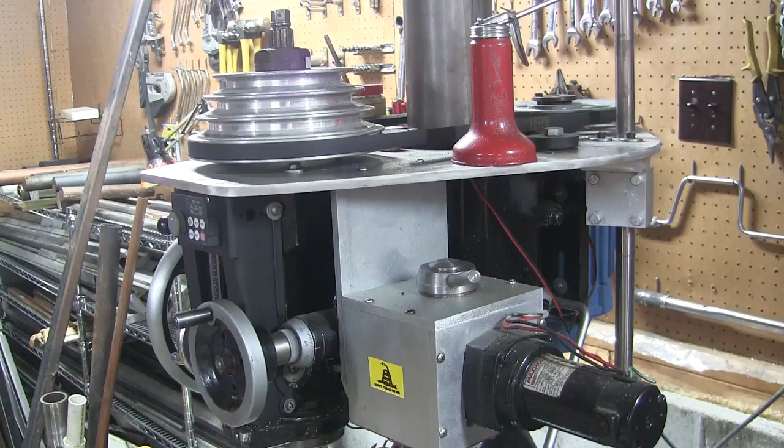Well guys, the time has come to do another modification to the mighty Rong Fu. And what I'm going to do is take the 2-axis DRO I have off of this thing along with this Z-axis, and I'm going to install a real 3-axis DRO.

People are probably wondering, why are you not going to use this anymore? Well, what I've decided to do here is to incorporate a Z-axis that will read the quill as well as the position of where it is on this RAM, on this column. And the way I'm going to do that is I'm going to get a scale that goes from this, well, let me get on the other side here. Goes from this bracket through the housing, through this plate, and up to this bracket.

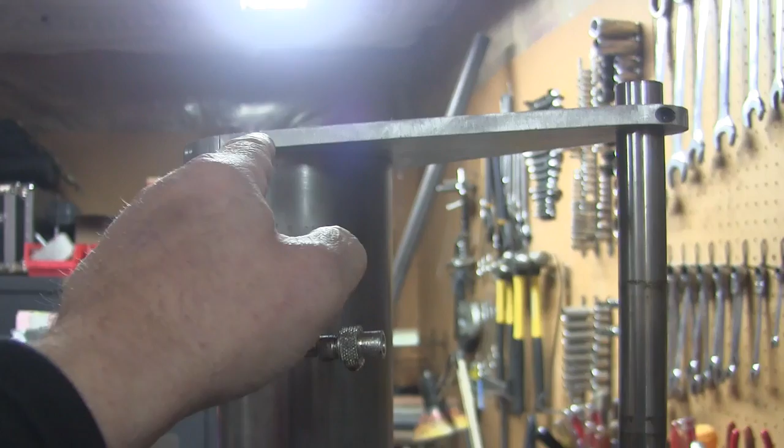Okay? And then I'm going to attach the reader to the quill. And what that will do is, when I raise the head, the quill will go with it, and that will read Z. And when I lower the quill inside, it will pull the reader down.

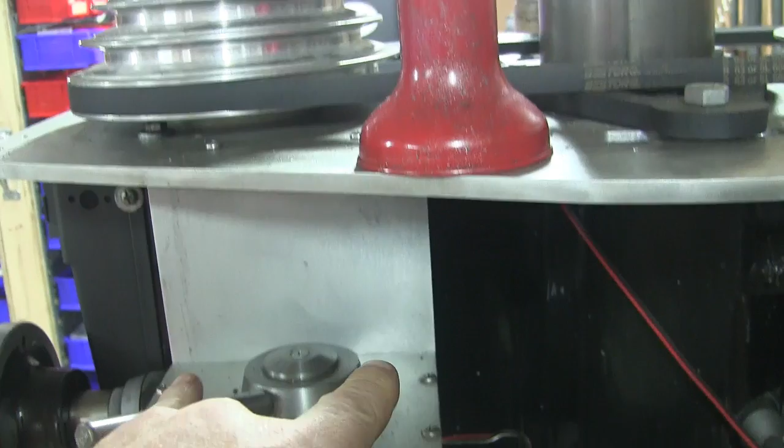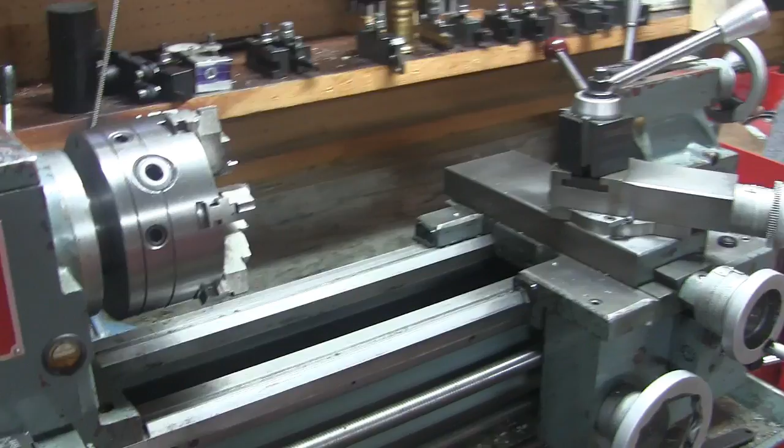Now, the reason I'm doing this is because I want to put this DRO, which is a 2-axis DRO, on this lathe. And you may recall that before I moved, I installed this encoder on the X-axis, which works great, but I'm kind of getting tired of swapping connectors back and forth between the mill and the lathe. So what I'm going to do is eventually I'm going to take this encoder right here and cut it down and mount it right here.

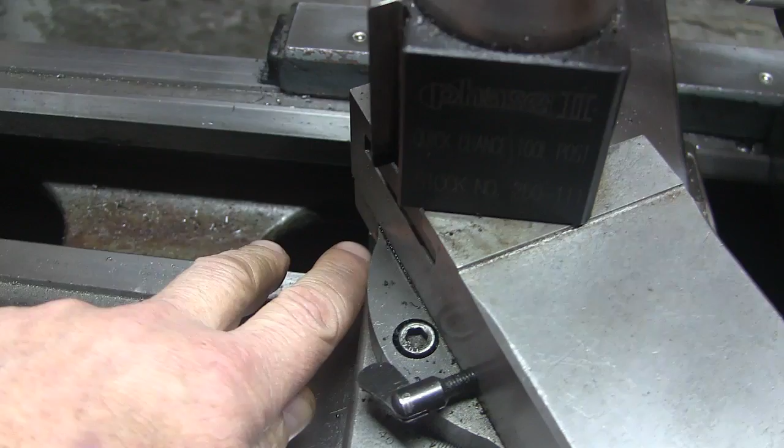I was going to mount it over here like I see a lot of people do, but with this lathe here, this edge will never get to this point here. It just doesn't get that close. The spindle sticks out farther than that. So if I put it on this side of the compound or the cross slide, I will lose the space in between the tailstock and the cross slide. But if I put it over here, I won't lose any space. So that's the plan for this, and that will happen subsequent to me taking apart the mighty Rong Fu.

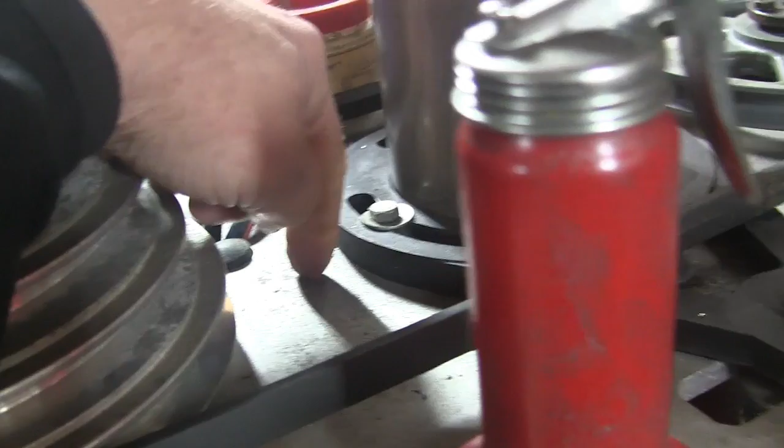So anyways, the one thing that I have to do here, well, there's a couple things actually. First thing I have to do is I have to drill a hole down through here to allow the encoder to come up through. And then I have to build a couple little attachment blocks right here.

Now, one of the things that caused me to want to do this is the fact that there are companies on Amazon in China that will sell you 3-axis DROs for a little over $300, which is like silly cheap. And they got 5-micron scales on them, which is plenty accurate enough for what you're going to be doing with the mini mill like this.

So the deal was with the one that I bought is they will cut the scales to whatever size you want. So what I did is I measured my X and Y and Z requirements, and I sent that to them, and they are sending me scales that are already cut to the lengths that I need. I hope they're going to be right. I might end up cutting them myself if not.

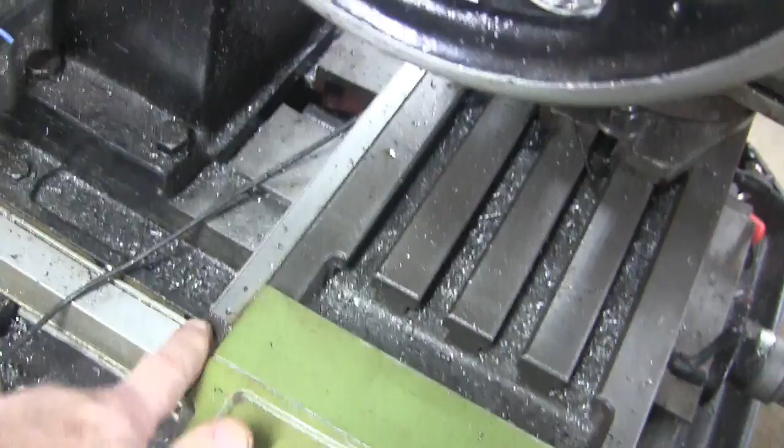I have cut these scales before. You've got to kind of be careful. What I do is I will cut the aluminum extrusions, like for this one. This one used to be about 4 feet long. I cut the aluminum extrusions, and then use a Dremel tool with a carbide cutter wheel to cut the glass. And you can do that. I mean, you got to be careful, and typically I cut my encoders as long as I can get them, so that if I do kind of chew up the end of it a little, it's not going to be a big deal.

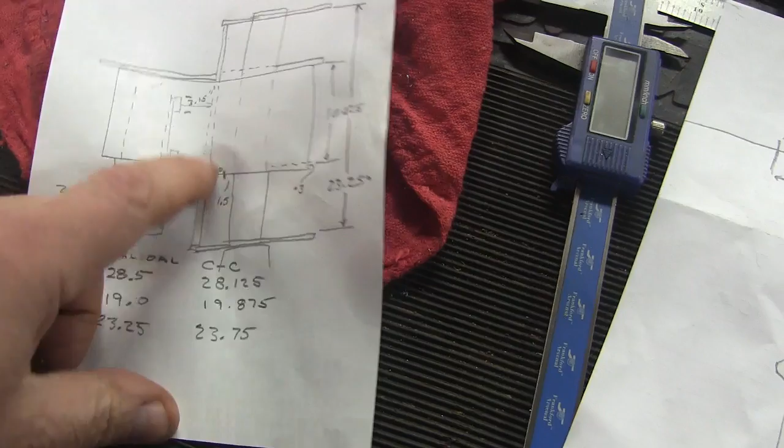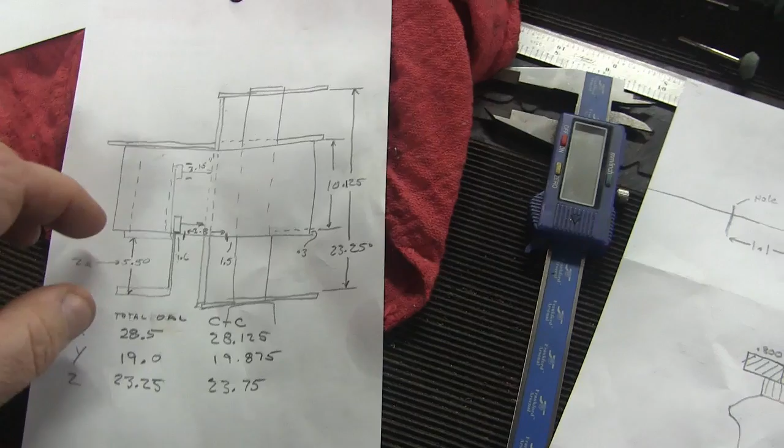So what I will do is I will attach a very rigid bar to the quill so that the encoder reader is encased within the head of the thing. And since the quill only has to move up and down, it's like 5.5 inches on my machine, that reader and encoder will always be inside of the head, so I don't have to worry about chips and stuff getting in there.

You know, obviously when I raise the head all the way to the top, there'll be a little bit exposed on the bottom and vice versa, but the encoder that I bought has lip seals on it, so as long as we're not really stupid with the air gun, it shouldn't ever be a problem. And I'll route the cable up and out the back for the Z-axis.

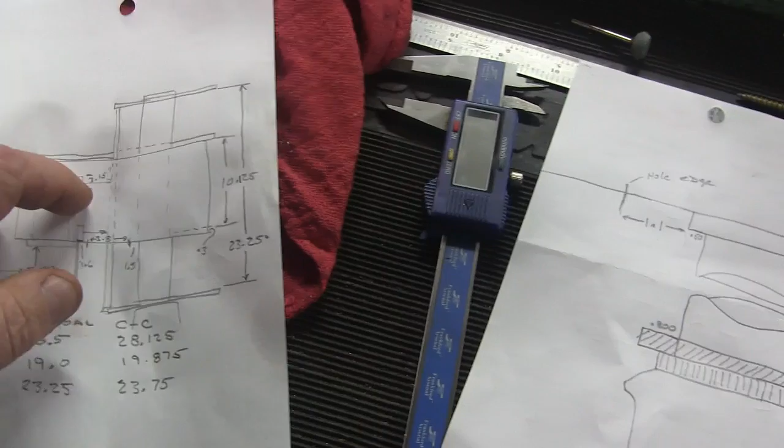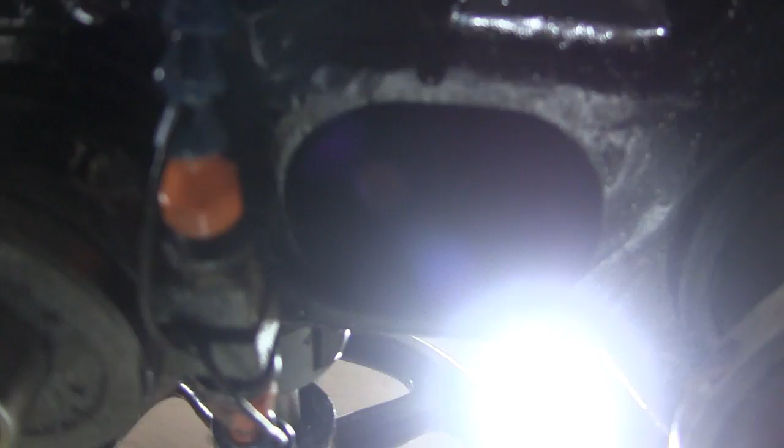So I'm going to get started here. I'm not going to show too much of this as far as me drilling holes in the machine and stuff like that, because everybody's machine is a little different. You know, I realize nobody has big plates on the top like I do, but all the RF30s have these holes right here, and typically it's for the light bulb. So that's where the encoder is going to come out the bottom of my casting. Alright, so let's get started here.

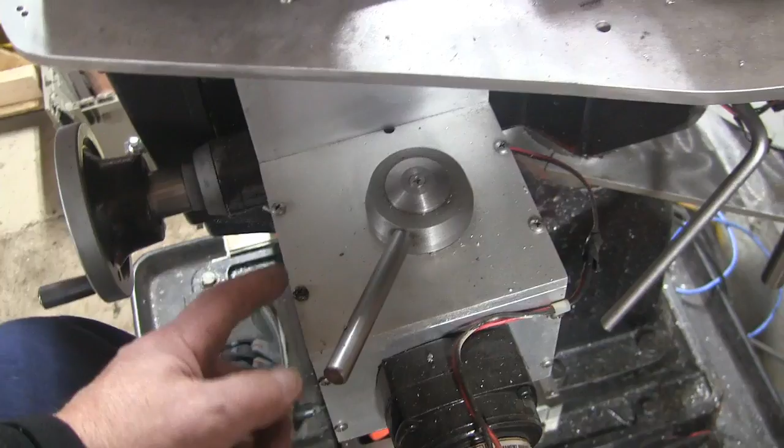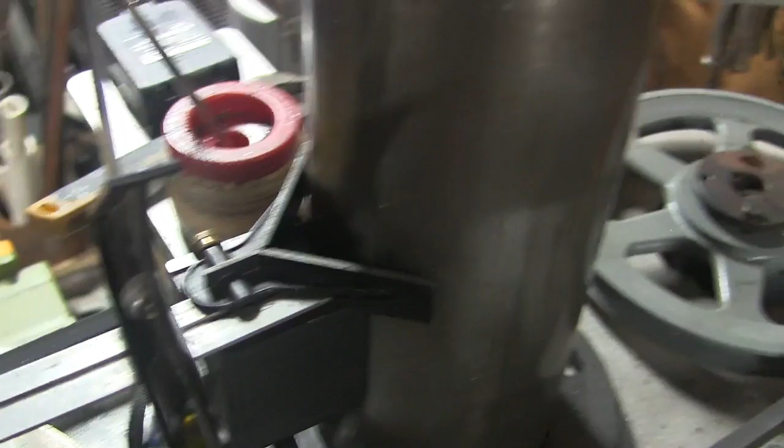Okay, so you're probably wondering how I located this hole. This column is the reference for everything. So what I did is underneath here, I measured how far away from the column the edge of the hole was. Not too hard to do. Then what I did is I came up here, I put a center finder on this column, and I used the center of the spindle as the other end. So now I know that this ruler is in line on the center line of the machine here.

Then what I did is I dropped another square down here, and the edge of that ruler is in the center of the hole. Okay, I just used a magnetic V-block there to hold everything up. So now you can see that I have a hole right down through the center of this machine. You can see my hand down there. The encoder is going to come up through this hole and attach to this bracket. It's also on the other end going to attach to this bracket.

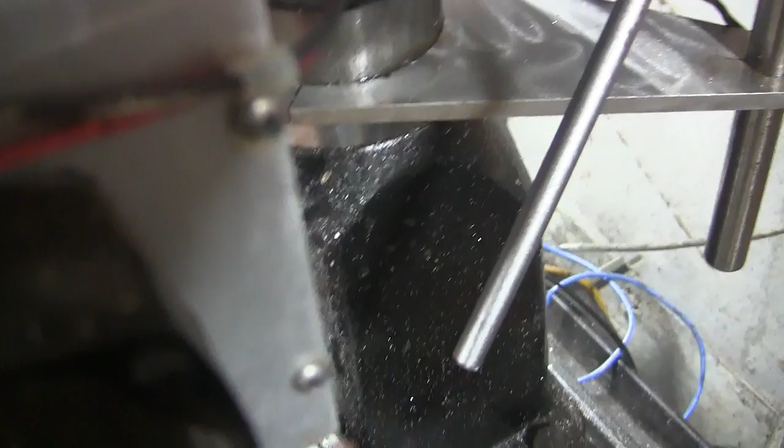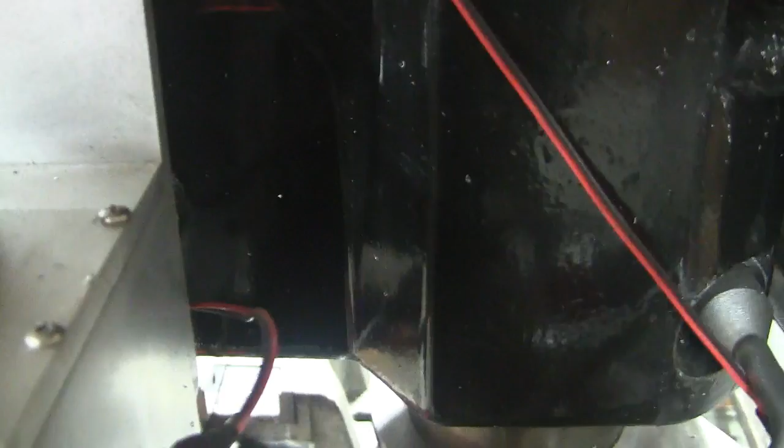Now this will be at a table reference. In other words, the table is not going to change in relation to this column, the Z height of it anyways. So what I'm going to do now is I'm going to mount a vertical post on the back of this bracket. Let's see if I can show you this better. Okay, right there. And that is going to go up through the hole, and somewhere about right in here at this height I'm going to mount the encoder reader head. So, you know, that's how I'm going to get the Z-axis to read both the quill and the column height at the same time.

Alright, today is DRO day, and we get our DRO scales custom cut to my specified lengths, direct from Hong Kong. And I gotta say, they arrived here in record time. So let's see what we got. Okay, it looks like there's two of them in here. I'm gonna have to measure these and find out which ones are which, but yeah, nice stuff.

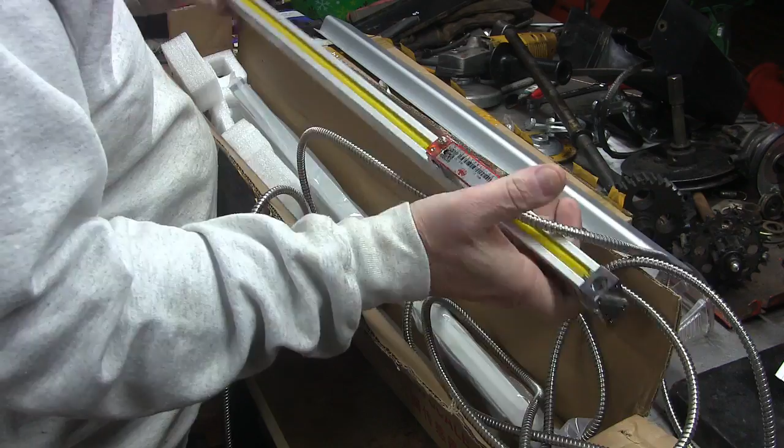All right, I'm betting this is the Z-axis, so I'm gonna test fit that thing in the head, and we also have the DRO head. Let's put these scales in a safe place here. Got another one here. So that's 3-axis.

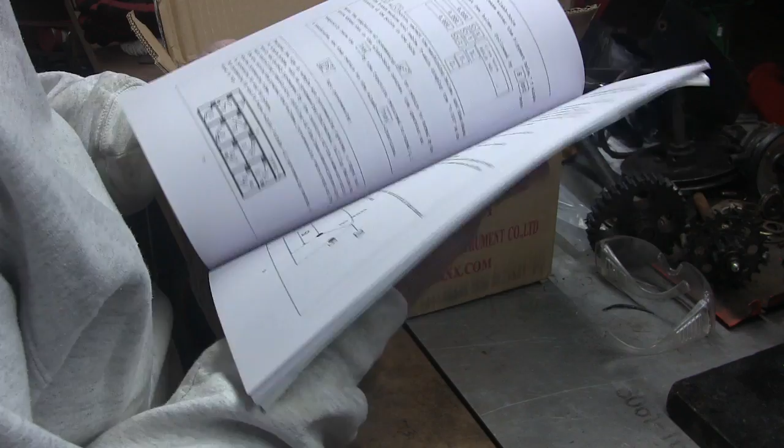Okay, so the one complaint I've heard with this thing is that this manual is ridiculously stupid. Yeah, it's going to require some study there. Got an arm. Don't know what that's all about. Collet rack maybe? Here's the readout itself. Holders.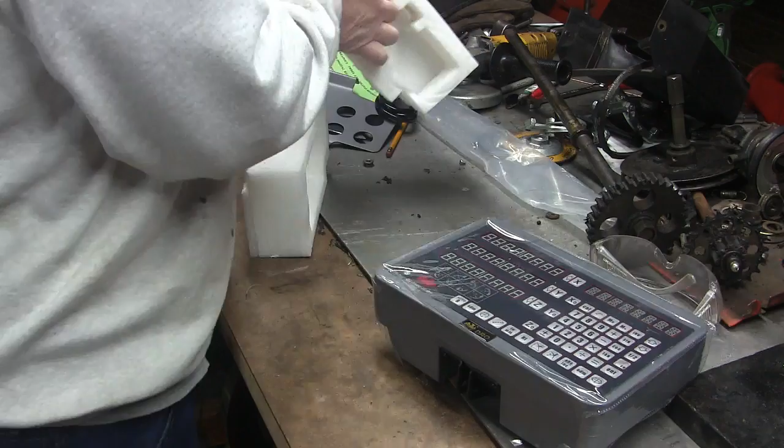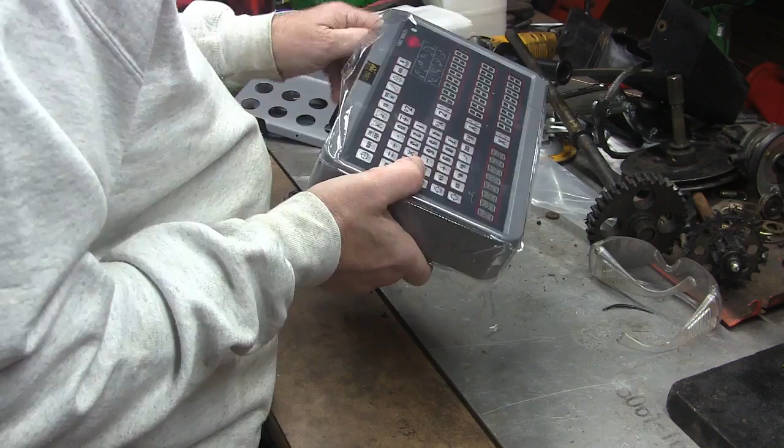Oop, there's something else in there. Swivel base thing. Yeah, this thing's light as a feather. I think they intend to have you leave this on here, but I'm going to have a look at it anyways. So yeah, this is pretty nice. Reasonable push buttons. All right, Chinese DRO.

So what I'm going to do now is make sure those scales are the right length that I specified, and see if they're going to fit on the mill here. So hang on. Well, these guys, they didn't exactly cut them right. Fortunately, they're all a little longer than they have to be, so I'll be able to do some stuff here.

I have to put this up from this side. But yeah, what they have you do is specify a travel length, and basically most people specify these things as total overall length. So a guy told me add 138 millimeters to the travel length and you'll get the overall length, but that wasn't exactly right. So this one's about 1 inch too long, but it's not a big deal.

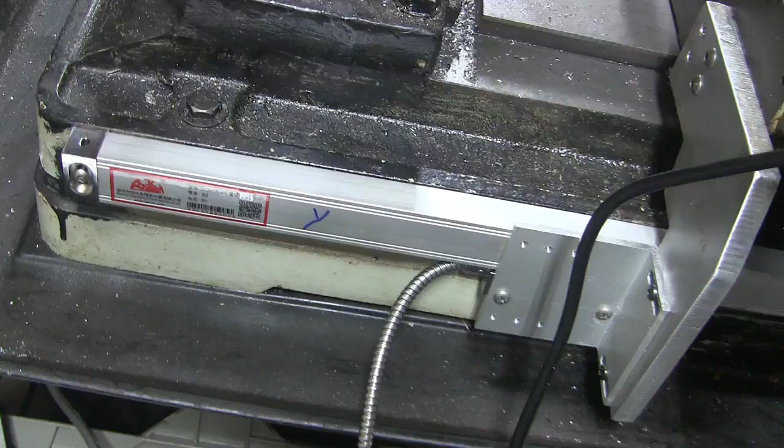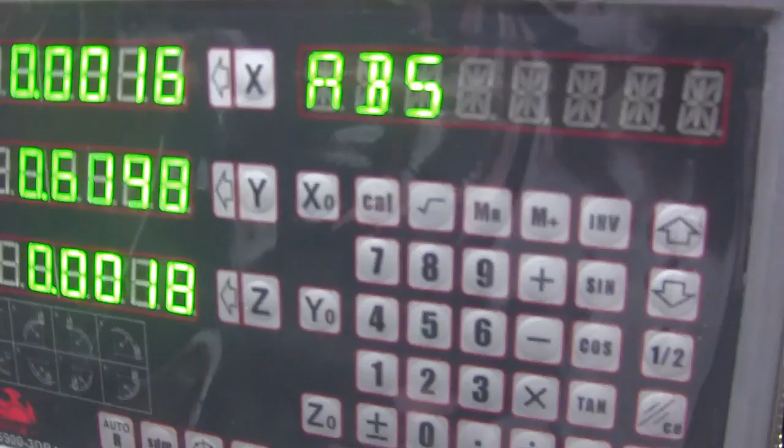Okay, I got one axis installed here, and I had to do a little bracketizing, but as you can see, it is working. Okay, so we're going to have to do the X now.

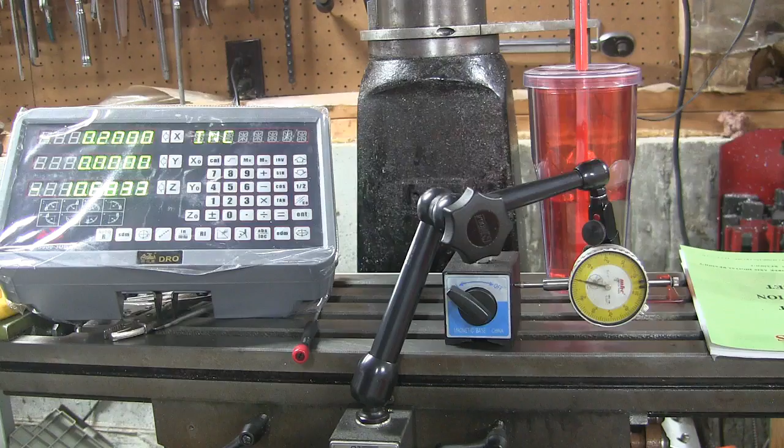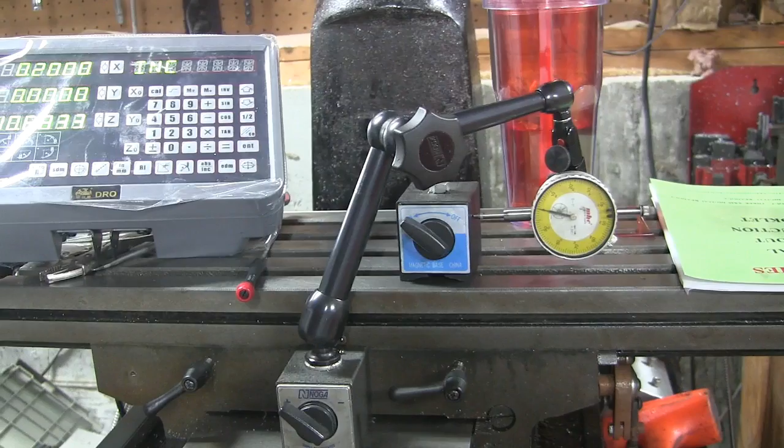Okay, well, I got the X and the Y mounted here, and I'm just doing some checks. So far, the Y looks perfect. The X I'm not so sure about yet. Kind of like over long travel distances, I'm getting a couple of tenths error. So I got to look at the specs in this book and see if I can decipher them. But I got them mounted. There's the Y. Reader head's over here. And the X is on the back. See that? So tomorrow I'm going to do the Z.

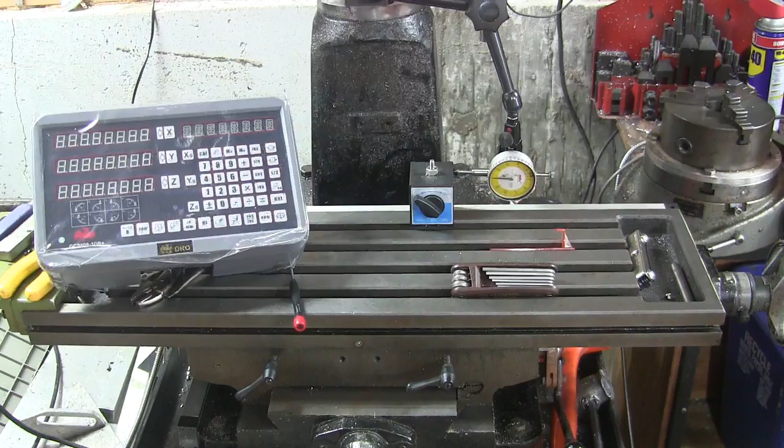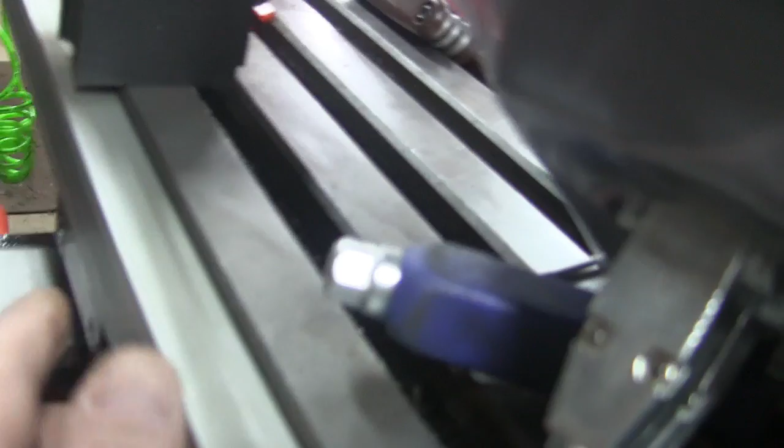Okay, well, I finished verifying that my X and Y scales are correct. I was having a problem with the X scale, and it turns out that on these particular scales there's a gap right between the reader head and the scale body itself that is really critical. So I had to kind of goof with that a little. I guess I kind of got lucky on the Y scale because that one just worked out. It was perfectly accurate.

The way these things come is like this. They've got this red shipping spacer in here, and when you take this out of there, you got to set the gap so that it's 1 millimeter away from the body of the scale, and there can't be any tilt to it. It's got to be perfectly flat. It's very critical. My Heidenhain scales here, these things work. You just throw them on there and they work. You really don't have to go crazy setting them up. But these scales here, they're very critical.

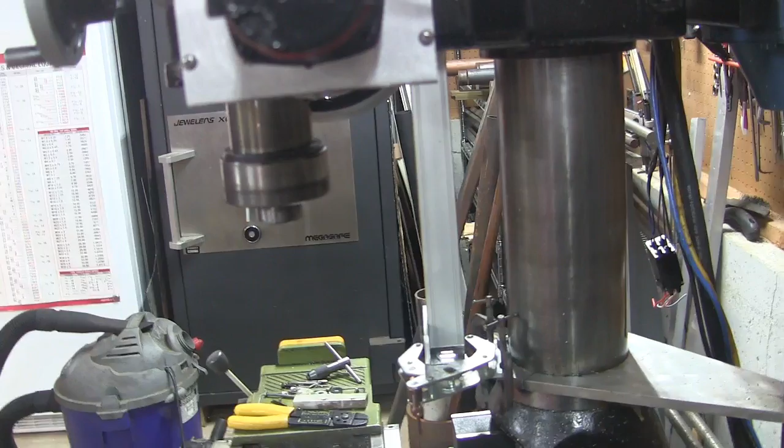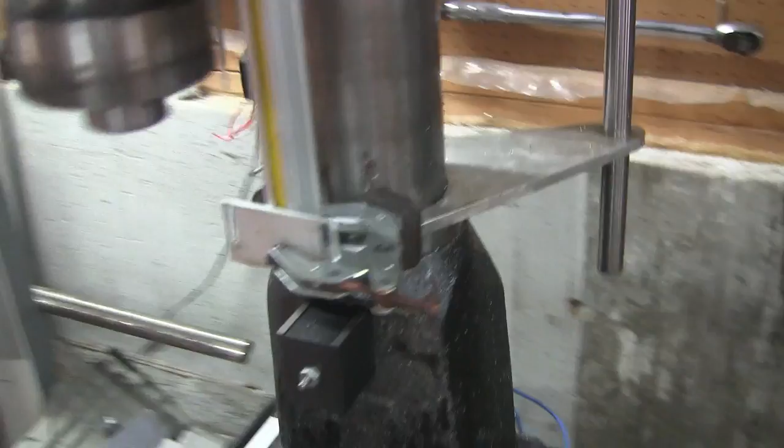Okay, I kind of got this mocked up the way it's going to sit in the machine here, and you can kind of see that I've got some brackets here. These brackets came with it, so I'm going to have to do a little machining with them, but that's basically what you got here. So the next thing I'm going to do here, because these are pretty much right up against the backs of my holes at this point.

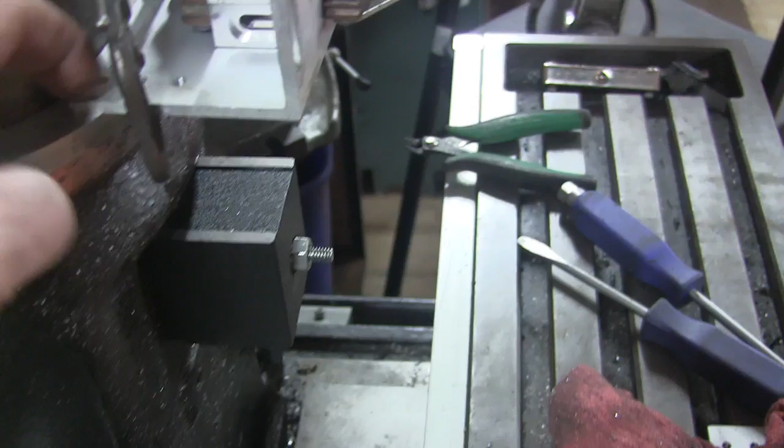So what I'm going to do is trim this down on each side here, and then I'm going to drill some holes back here and tap them in and make sure everything's squared and centered, and then I can hook the scale to it. And then up here I'm going to do a similar thing. So yeah, a lot of layout here and some cutting, but we'll get it. But that's basically how it's going to work. And here's where the cable's going to come out up the top here and go back to the display.

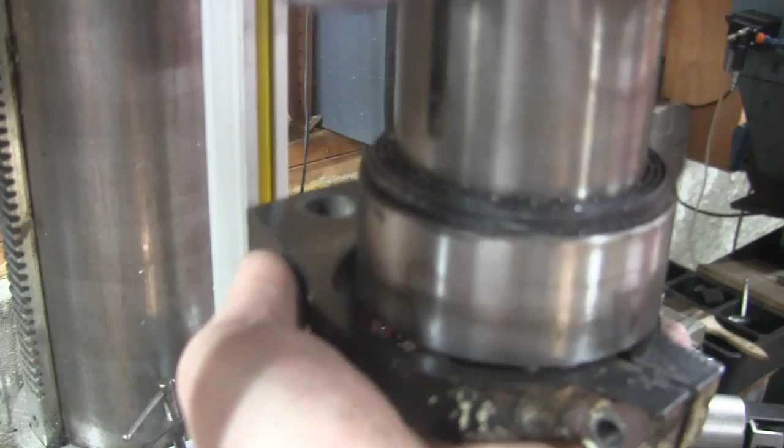And then what I did is I got this piece here, which is usually the height limiter, and I'm going to mount this thing backwards like this, and then there'll be a piece of metal on here that'll go up inside the head and connect up to the encoder reader head.

Okay, so here's how we line up the bracket. I got my vise trammed in, and I put some packing in there and a block and pull this up to it. Now I know this surface is square to the table, and I'm going to have to verify that this is parallel to the table, but it should be because I made these pretty accurately years ago.

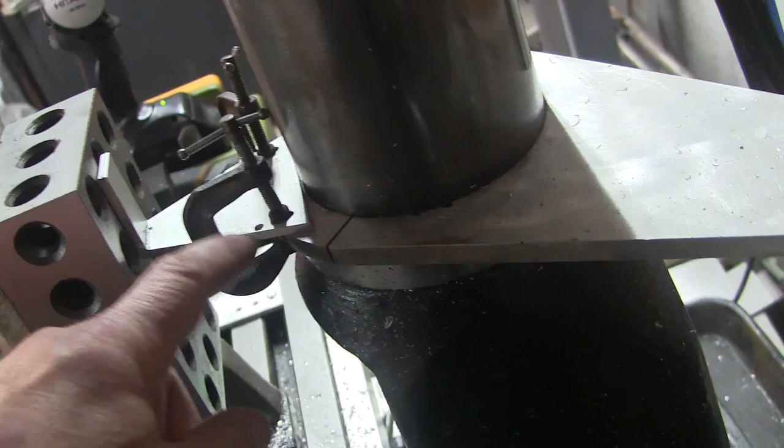What I'm going to do is put 2 screws in here, maybe 3, and then the encoder will come down. I'll put a hole in this, and we'll bolt the encoder to that. Up top we still have to make the bracket, but I had to take it apart because I had to use a milling machine. So it's a process here, but we'll get it going.

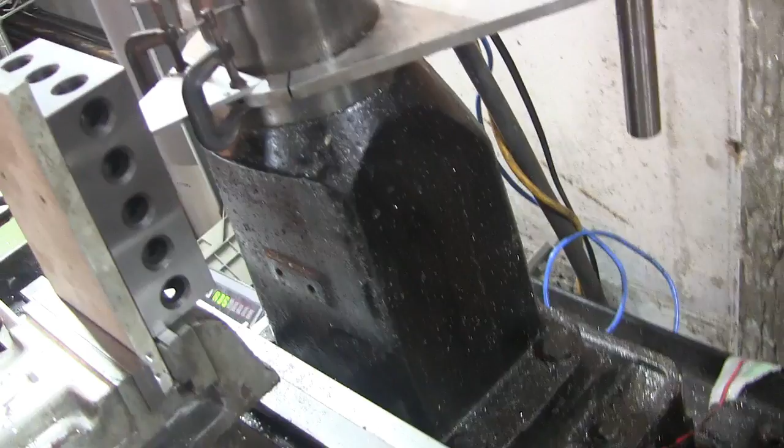You know, the X and the Y were easy, and I'm actually using that right now. The Z is a lot of fabrication. Fortunately, they supplied a lot of these kind of brackets, so I'm able to utilize them to make the appropriate attachment points here.

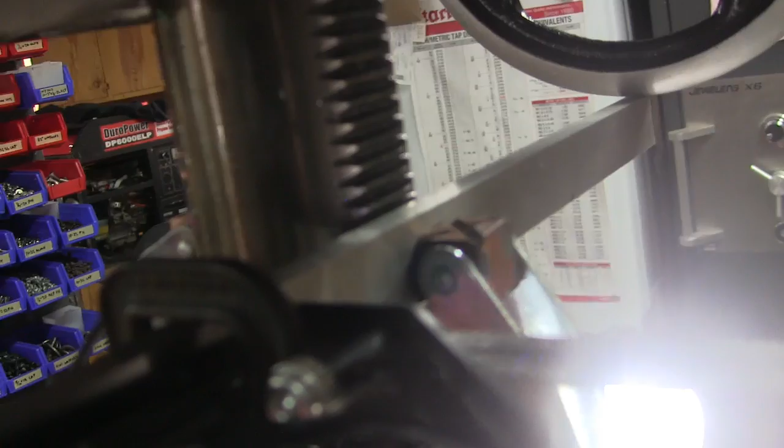Okay, so here's what I've done. I've got this piece of ground stock, which I'm sure is very flat, clamped to the rack on the spindle, on the quill. And then I took a very accurate square and clamped it to that so that it was just tangent to the side of the column.

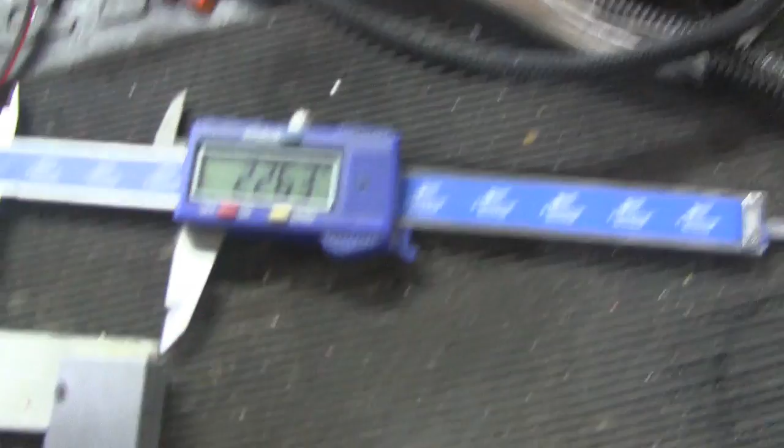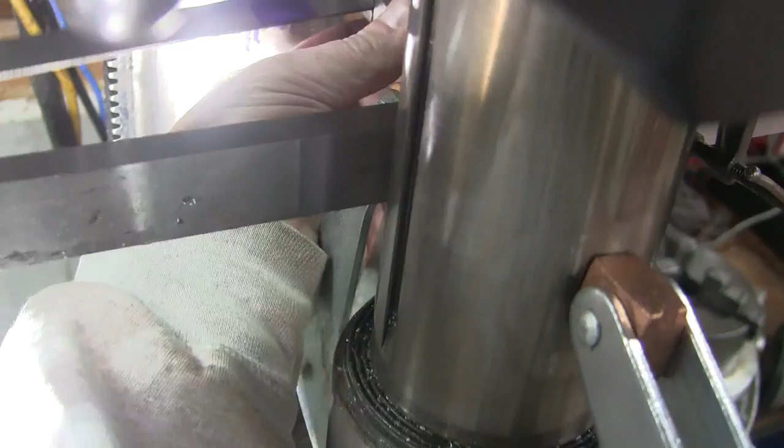Then I took that measurement of the column diameter and divided it by 2, and I took a machinist square, blued it up, and put a line right there. So now when I take this square and hold it up against this square, that line should be right on the center line of the quill.

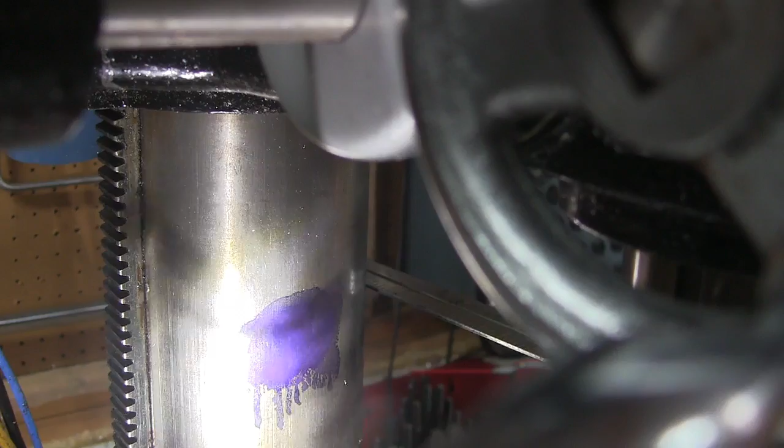How can I show this to you here? There's too much stuff in the way here, but take this, put this on my square, and that line that I scribed on there should be right on the center line of the quill. So what I'm going to do is scribe that line on there.

Now, you know, this is a little unnecessary because I will have an adjustment slot here, but I want to get this bracket on the center line as close as I possibly can.

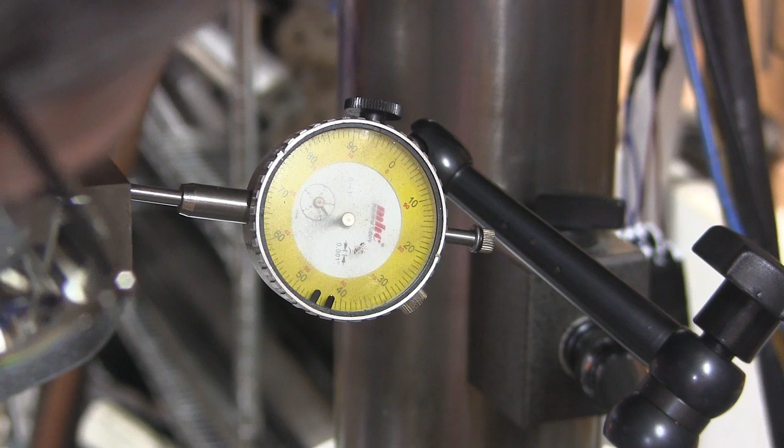Okay, so I got this bar clamped onto the quill flat on the rack, and I've got a dial indicator on the column, and it's touching this bar. So there is some slop in the quill. You can see there's 150 thousandths way out here on this thing. I mean, the quill's hardly moving at all, but what I'm going to do is set this to 75 and lock it.

So now the quill is locked midway in its rotation. There's a key here on the left side of this quill that prevents it from rotating in the head. So what I've done by doing this at 75 thousandths is put that keyway right in the center.

My assumption is, and this is a big assumption, that when they machined this head, they put that keyway perpendicular to this thing. You know, if it is, it is. If it isn't, it isn't. It's probably going to be within the adjustment range of my brackets. So that's what I'm doing here now.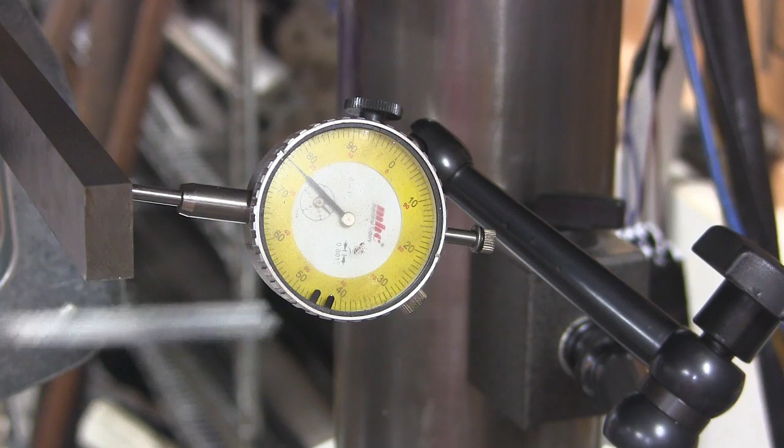Now I'm going to take this machinist square, and I've blued up the column here. Actually, now I'm going to take this and clamp it to this piece of tool steel here and put it tangent to the head. And that's going to give me a reference back here to the edge of the column. Okay, so that's tangent now.

Eyeballing it right down the length of this rule here. And that's tangent to it, right here. Now, what I'm going to do is, in a couple places, get a tangent line here on this quill, one here and maybe one down here. And then I'll be able to draw a straight line down to this bracket here, and I'll know that this is the center of the spindle.

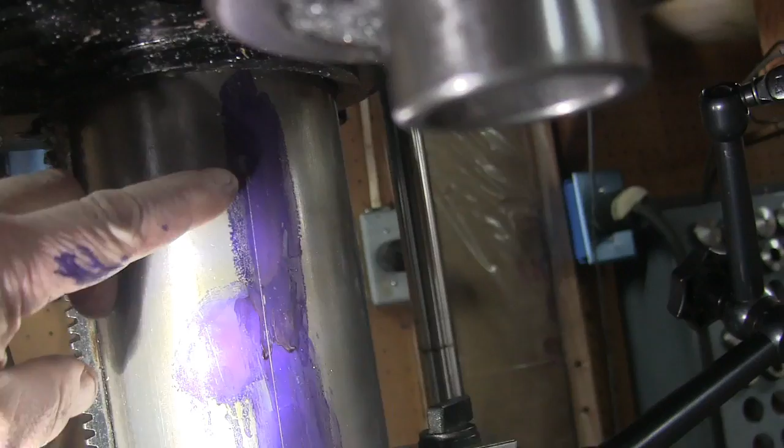Okay, we made our measurements. One was right there, and one was right there. We continued this line down, and we found the exact center of the column. Can't see the mark, but it's right there. So now I know that if I center that bracket on this line, it will be right in line between the spindle and the column.

Well, that scale's installed and lined up, and let me tell you, it was a hell of a lot of work. A lot of calculating, a lot of measuring, but it's in there. And you can see the reader head here is, I got it lower than it ever will be, because what I'm going to do is connect it.

And I ended up turning this thing around so it was sticking back farther. But you can see if I go up and then over, I can connect to that. And this part of the scale will never be used, so I'm really not worried about getting crap in here. All the stuff that will be getting used is up inside of there.

Alright, the Rong Fu is making itself here. Just cutting a piece here that will become the vertical part of the encoder drive there. So this will probably be the last piece I have to make, and we'll just be into some alignment.

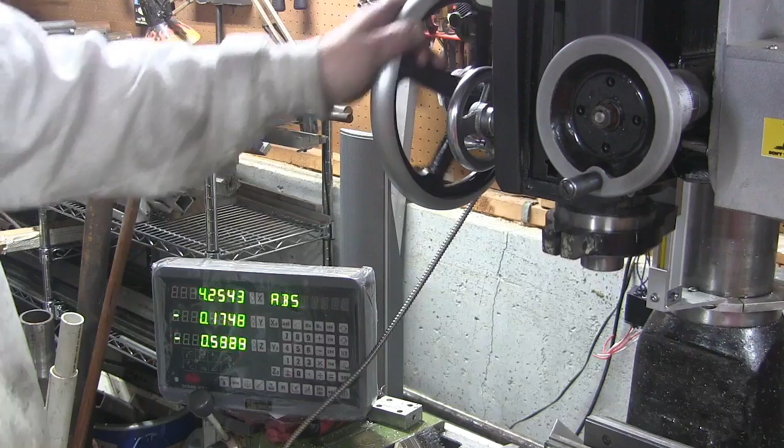Alright, here we go. This is working good. So we got regular Z-axis. And we got this bad boy. Okay, we got some cables to mess with. Got to put this whole thing back together again, but the plan worked. Man, I'm telling you, I think I used every tool in the shop here, but I'm happy that it worked out good.

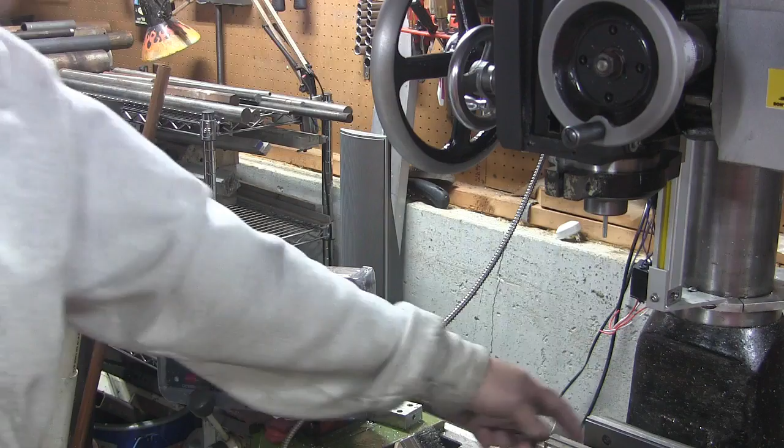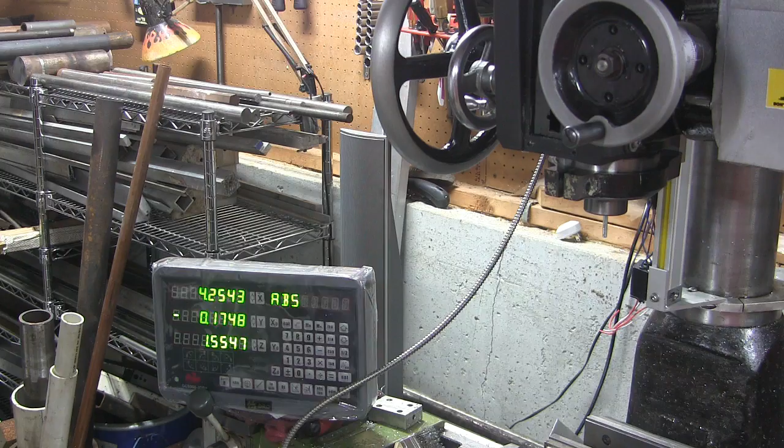So what else can I say? I got to mount this DRO readout. I got to route these cables. I got to fish a drill bit out of the base of my milling machine because something fell down in there. And then I got to clean up this disaster area. But yeah, I'm really happy. And you can see that, even when the quill is all the way down, the reader head is still up inside of the machine.

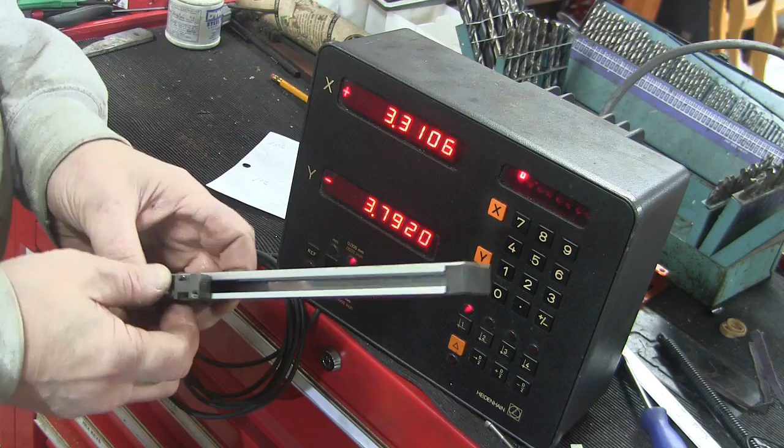Alright, I used the new DRO to cut the scale for the lathe DRO. This one used to be on my milling machine, and she works. There you go. So we'll attach this to the lathe now, and we'll have a 2-axis DRO on the lathe and a 3-axis DRO on the mill.

Okay, here's a little tip if you ever decide to put a DRO on your lathe. The way this lathe is set up, I needed a 1/4-inch spacer between the cross slide and where I'm going to attach the reader head. That puts both of these on the same plane. So what I did was I cut out a piece of 1/4-inch bar stock to space it out, and I put it on the mill, and I drilled tap holes in the aluminum block. Then I spaced it off the bottom of the carriage with just this ruler. It happens to be 25 thousandths thick, which, I needed a little gap in there.

Then what I did is I used this aluminum block as a guide to drill in with a tap drill into the side of the casting. Then I drilled the aluminum block for a clearance hole, and now I'm using that as a tap guide to tap these holes. I got this one tapped already. I'm on this one. As soon as that's done, I'll be able to mount the reader, the encoder, on this bar, and it will be permanently mounted there.

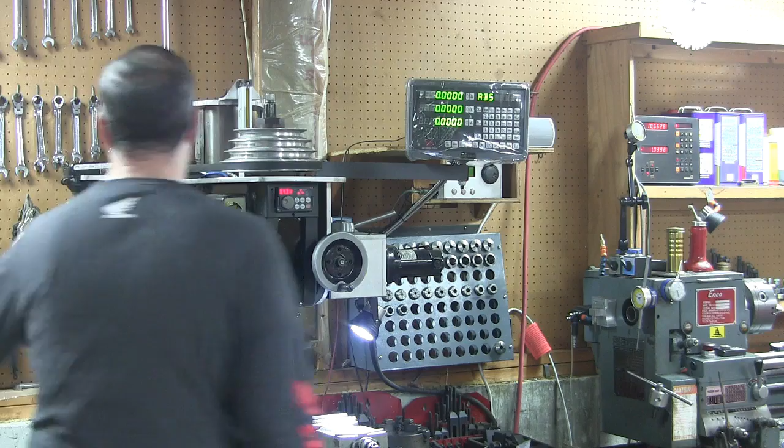Okay, we got the DRO all wired up, got all the cables routed, everything looks good. Got a light back on it. I put one on. 2 was a little too bright, so got one 10-watt LED that I can point anywhere I need it to be. The DRO tracks the head and the quill.

Can also see I got the lathe DRO hooked up. Got the X and the Z. So we're all digitized here at the Cuppa Joe Studios now. I'm really happy with the way the DRO turned out. It was kind of a lot of measuring. Pretty good project to get the scale through the head of the mill. But I think it's going to work out good.